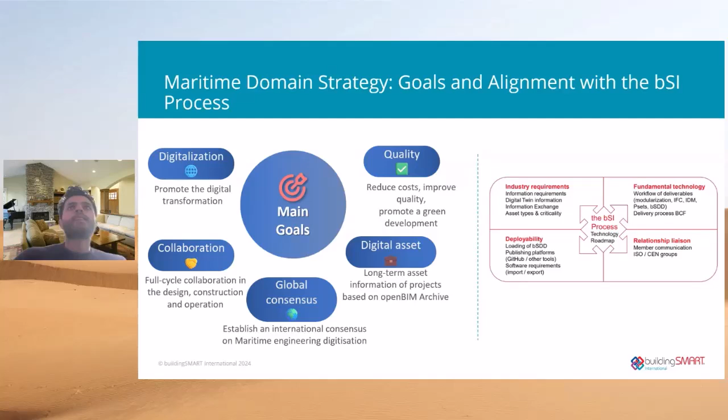Moving on to show some of the potential partners in the maritime domain. We have SINTEF, a leading research organization specializing in maritime sea farming systems and digital tools. What makes their work unique is how they use digital platforms to seamlessly connect subsystems, creating a connected approach to sea farming. We believe SINTEF is interested in joining us, and we've had several discussions with them to see how we can align their work with ours. There's great potential for collaboration in the future.

Another potential partner is Xlinks. They specialize in transferring power from offshore wind turbines to land-based grids using undersea cables. This is one of the points mentioned later in our charter, one of the research goals in the maritime domain. Their work aligns with our vision, and it's important to standardize offshore structures and undersea cables, because one change can affect the entire system. If Xlinks comes on board, they can propose cable-related use cases that help us understand this area and integrate it into our future work.

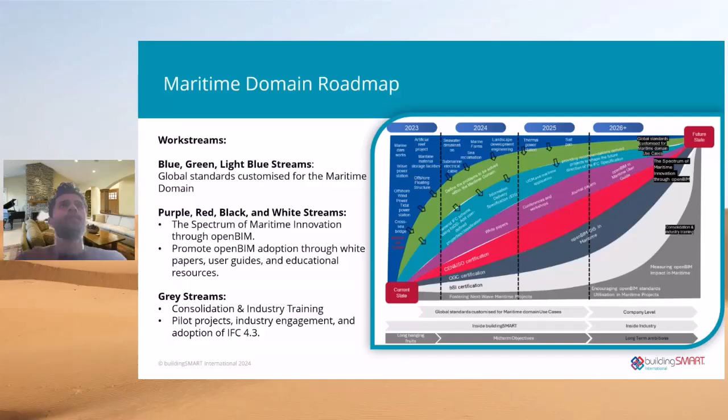As you see, there are different streamlines and work streams in this roadmap. Everyone is for something, and over the next 3 to 5 years, the mission is to implement openBIM workflow in the maritime domain, or align it with the maritime domain.

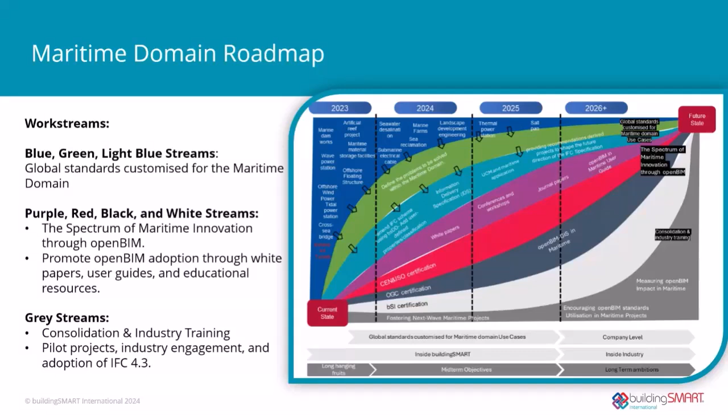We have, for example, here the draft project plan for the immersed tunnel. This is one of the projects that we'll see in the next few slides, and it will help us start to see how we can implement the openBIM standards in the maritime domain. So it will be a starting point for us.

Potential projects - another potential project comes from CCCC, as I mentioned, they're focusing on offshore structures. This is a larger scale farming project in China, located in Dandong City in northeast China, covering 94 square kilometers, fully invested, constructed, and operated by CCCC. They invested around 660 million euros in this project.

They're planning to enhance marine biodiversity by adding these types of reefs and artificial fish sea reef areas, and also including different technology - I see here along the floating breakwater system. There's a lot of interesting things that can be explored, and they all fit under the maritime domain.

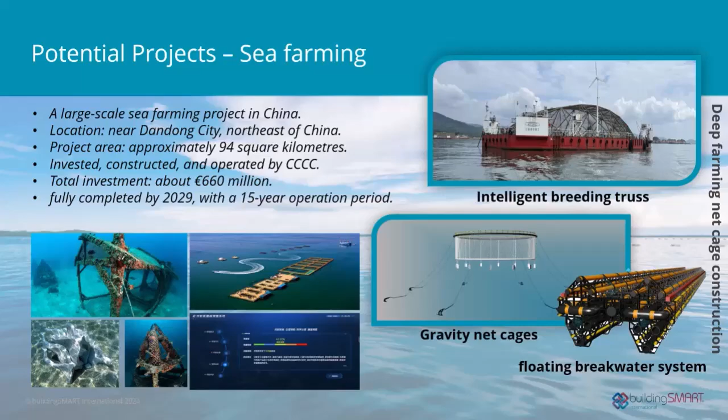But of course, when it comes to proposing any projects, you can start with your draft project plan, and this will be reviewed by the maritime domain steering committee. If it aligns with the vision and mission, we can see if it actually fits under this domain - that decision will be made later. This is why we release the charter and roadmap for you to have a look, see if your projects align with this vision and mission, and if they fit this domain within buildingSMART, because there are a lot of other domains.

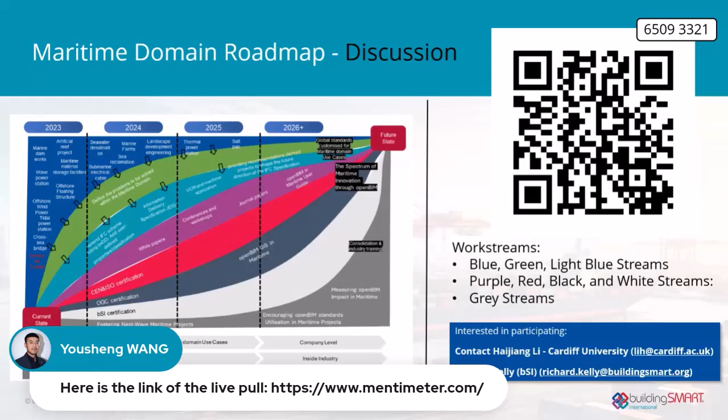As I said, the Maritime Domain Charter is available, and also the roadmap is available, for you to review. You can have a look after this session or in the future.

Let's see if we get some people online. If not, after 5 minutes we can move on. I'm just suggesting that we put the slide back up that shows the potential projects that the domain is going to be addressing. This one? Is that possible? Oh sorry, yeah this one? No, I meant the matrix one. One more, two more. That one, yeah, that one, okay.

So the question to the audience has been, is anybody interested in these particular topics within your industry? And are there any other topics you think the maritime domain should be addressing? It's open discussion, so whatever feedback will be good to discuss, there's no judgment.

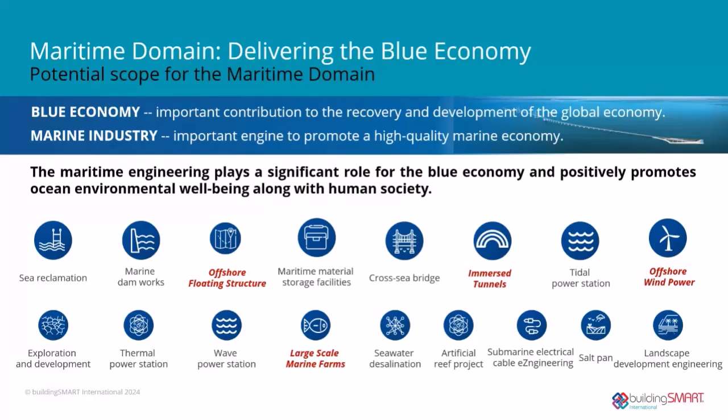I was interested in that undersea cable network, 3,400 kilometers. It's such an obvious idea, but I would have assumed there would be significant transmission losses over that distance. I guess though, if the power is being generated by renewables, then transmission losses probably don't make that much difference, or they're not quite so crucial. And I suppose if it was a thermal power station that's only 33% efficient to start with, and then you're getting transmission losses on top, that wouldn't be worth it. But if the energy's free, then I guess it's okay.

For this second question we have a few answers: flood protection, coastal protection, subsea cables, harbors, submerged tunnels. Submerged tunnels and immersed tunnels are quite a big thing coming around the tunnel projects, which we'll explore next.

I think that one is a bit more detailed, so I will skip this and see how and what area you would like to contribute in the maritime domain. Let's see what expertise you think, or which area you're more interested in.

For people in the room not so familiar with the buildingSMART standards and services, a brief high-level explanation: if you've got requirements in your industry for things you'd like to see digitalized, you specify those requirements in human form, we write things down when we talk. The IDS standard converts those requirements into machine interpretable, computer interpretable requirements, which then allows it to be addressed through the other core standards of buildingSMART. What we're asking the domains to focus on is capturing those requirements, converting them to machine interpretable form through IDS, and then creating a library of entities. That library goes into the buildingSMART data dictionary. Because the data dictionary is linked to the core IFC schema, which has predefined properties and classes, and software vendors are linking their software to IFC, your entities end up in interoperable software. You then get the benefit of using that information on your real projects or operations using multiple software sources, because different suppliers and applications use different software. So it's about standardization of the format for you to get the best access to the information you need.

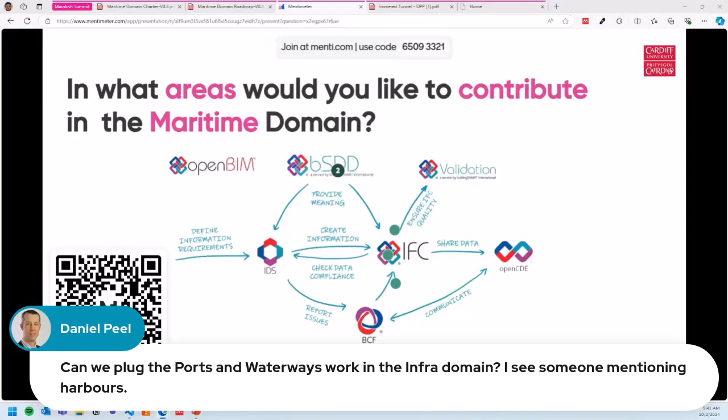Yeah, I'll answer, you mentioned harbours, I'm happy to answer that. The domains are just vehicles, the destination will be the same. So the infra domain has a steering committee of people from the infrastructure industry, the maritime domain will have a steering committee of people from the maritime industry. There is huge crossover, of course there is, the people on each committee could easily sit on each other's committee. What the domain does is oversee the program plan for the next few years and create the program plan. The projects that get delivered could sit easily under one domain or another, and we do a lot of inter-domain collaboration. For example, the IFC 4.3 standard was created through two domains, multiple projects, two domains, one program, and the program was IFC 4.3. So the short answer is yes, we can do that.

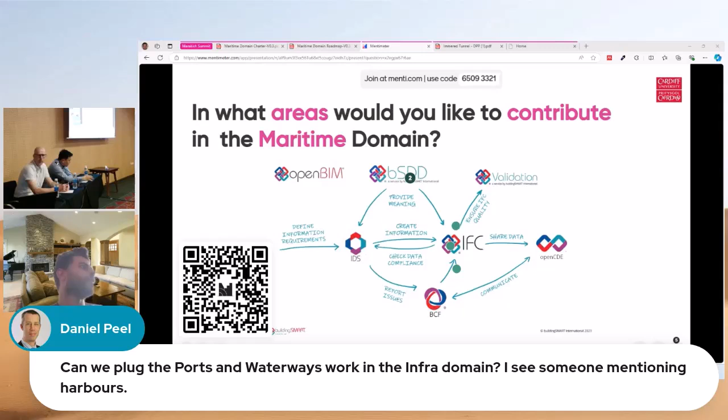And we can see this example in two different projects: we have the IFC tunnel and IFC immersed tunnel.

That's the two projects. There will be a lot of cross between the two domains. You can see them both. They're actually in different domains, but they're serving the same purpose. We're trying to reach the same goal at the end. And same thing for the airport and the building domain.

So they have some entities or properties that overlap, but they're in two different domains, still trying to reach the same goal. We saw this before in other projects. For IFC Harbor, it is currently in the infrastructure domain, but we can learn from that and see how we can leverage this also under the maritime domain.

And that's actually the last question before we go back. Or we can skip this one, is just to see what's the expertise of the people around and how they can actually contribute in this domain in the future.

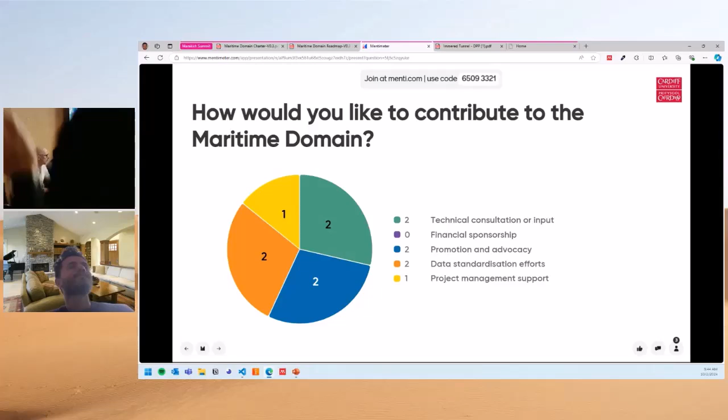Thank you. Just thinking about the advocacy thing, something I'll be saying to the building and infra rooms later today. Do we need to have a focus on the client requirements, the real requirements, and making sure that they are integrated into our projects, so that rather than just describing solutions, we also model and check that we're delivering the capacity and the performance of whatever facilities we're modeling. And I think that would help get the message into the boardroom.

In my view, absolutely yes. How we do that is another matter, isn't it? What do other people think?

Okay, so we'll leave that there for now, but let's just see how the Mentimeter is going on this particular question. Okay, that's nice.

Yasheng, is the intention to actually capture people's names at the end? Because for this particular one, I think we'd like to know who those people are. Okay, well Ali can see who they are. Ah, I didn't realize that. Do you still hear us, Ali? Yeah. I don't think you can see the names.

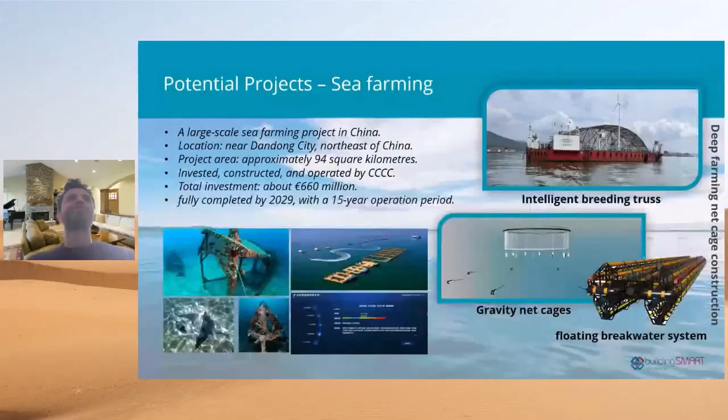So the next one we have the immersed tunnel project, and we'll take this opportunity to provide some updates. We're still on the draft project plan stage, but we made some progress working with our partner HPDI, and also with Royal Haskoning, who showed great interest in this project. I want to acknowledge the expertise of Roy Van Hatten and Renee Zilstra from Haskoning's Immersed Tunnel Design and Consultancy. We had a few meetings before the summits, and we're going to continue this discussion after the summits, so we can have this expertise when it comes to immersed tunnel.

This is more, I think Richard's already explained this, so I might skip this. This is the way of creating the standards: we create the core industry requirements, create a candidate standard, then we test, then once approved the standard into the final stage, and we prepare for ISO publication.

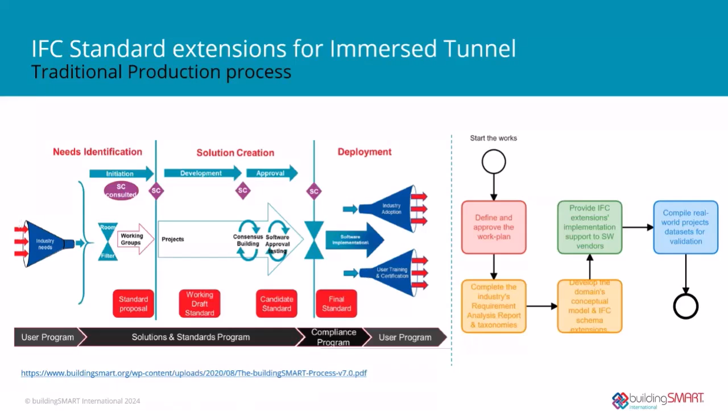But we see engagement from the software vendors usually happens in the late stage of the process, which can cause implementation delays. Sometimes the availability of the solution to the community will be at a later stage. So this process is still happening today, but in a more evolved way, I would say.

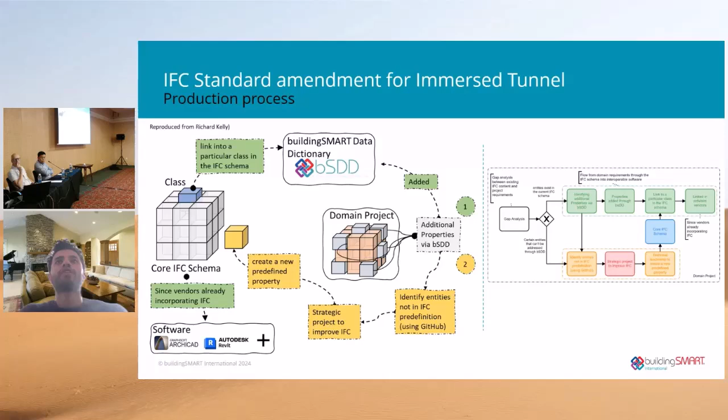So this comes to this diagram that was reproduced from Richard. If you see here, we have two ways. This is how a domain activity interacts with the IFC schema, and the opportunity for the domains to propose improvements.

If you see, there's two different directions. In a domain project, you can define or identify additional properties that are not available in the current IFC schema. You add these additional properties through the buildingSMART data dictionary, which is directly linked to the IFC schema.

This requirement ensures it's actually interoperable with software, because they already implemented the IFC schema and are compatible with it, so they can keep that loop of work. Even when the IFC schema is updated to a new version, say IFC 4.4, not sure about IFC 5, this flow remains consistent, and the domain requirement will integrate smoothly across these versions of the schema.

But sometimes when we do our requirement analysis, we find a gap - a certain entity does not exist in the predefined IFC schema. In this case, once we identify these gaps, we trigger what we call a strategic project to improve the IFC schema. This is led by the technical leadership team of buildingSMART to create the necessary properties and integrate them into the IFC schema.

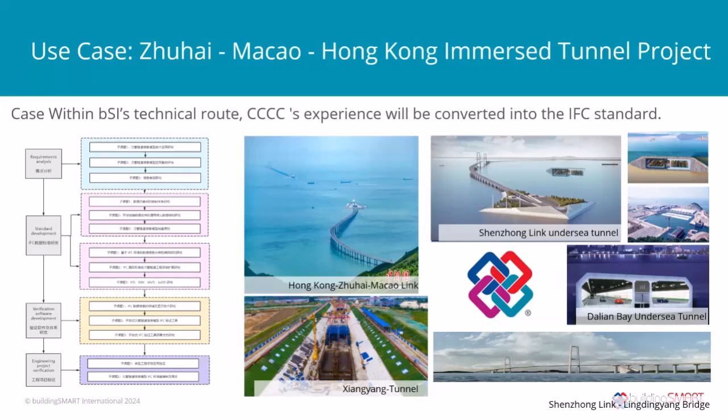If we look at the underwater construction, there's a lot of heavy machines that are all offshore, with these advanced systems. So we need to understand what entities or properties can be included - this is where we do our taxonomy and see all the relationships between these entities.

So we are not focusing only on the design. We can go further and focus on the construction stage as well. But that also depends on the use cases we will have and how we can align them.

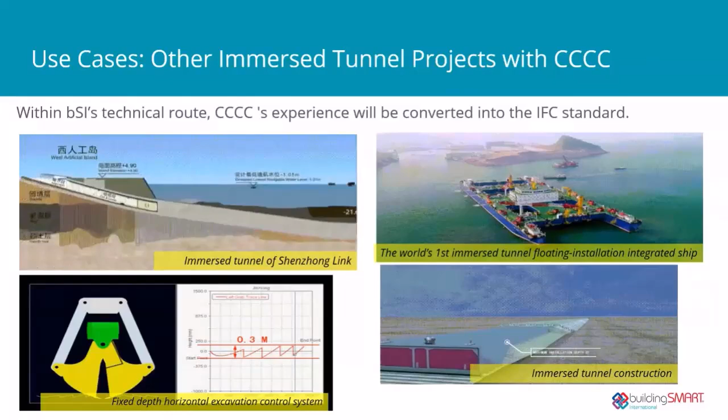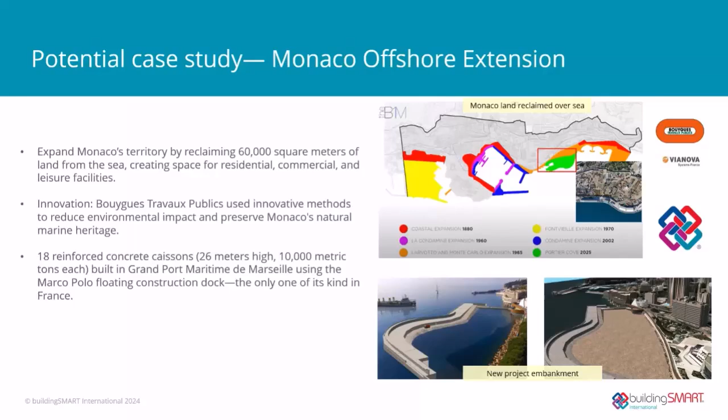In this project, we're referring to the Monaco offshore extension, which was provided by Michel. I think this is self-explanatory, so let's go to this video.

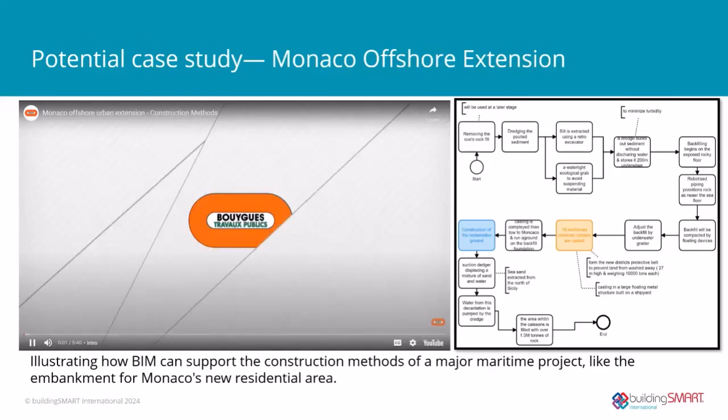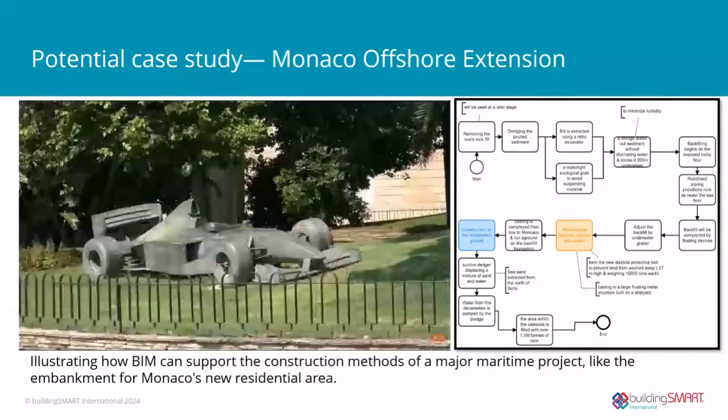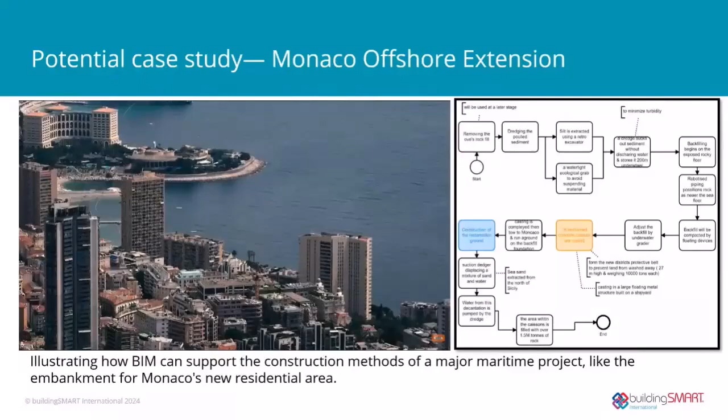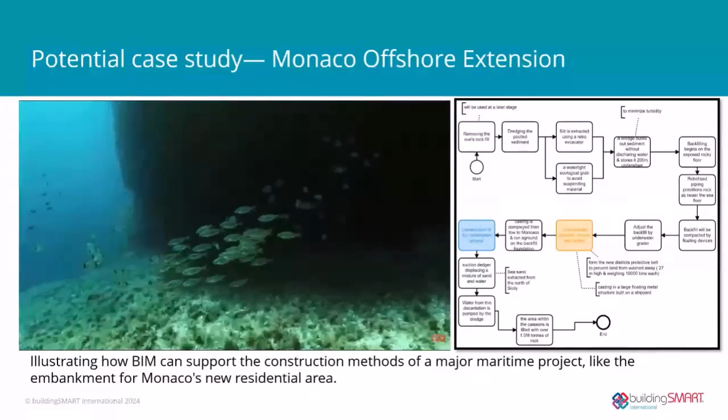For Monaco's Offshore Urban Extension project, Bouygues Travaux Publics has developed unparalleled construction methods to minimize site impact on the environment. Enabling 6 hectares to be reclaimed, the infrastructure is, for the main part, built from the sea. It is made up of reclamation ground surrounded by a concrete caisson belt placed on an underwater backfill, able to accommodate a small port. As early as 2014, with its partners Tractebel, Andromède Oceanology, and DHI, the consortium carried out an impact study to pinpoint the site's environmental challenges and integrate them into the project's core conception and execution methods.

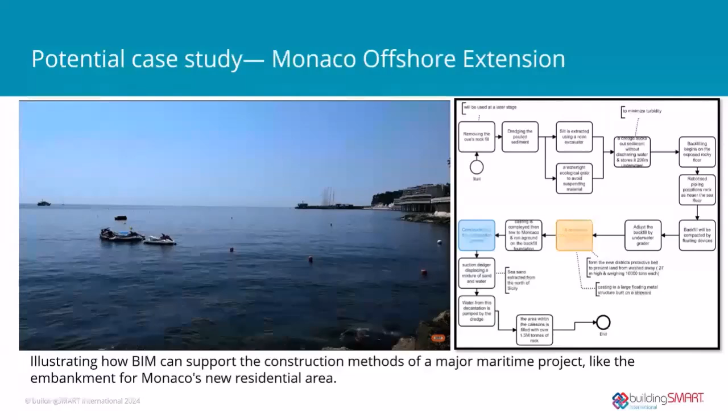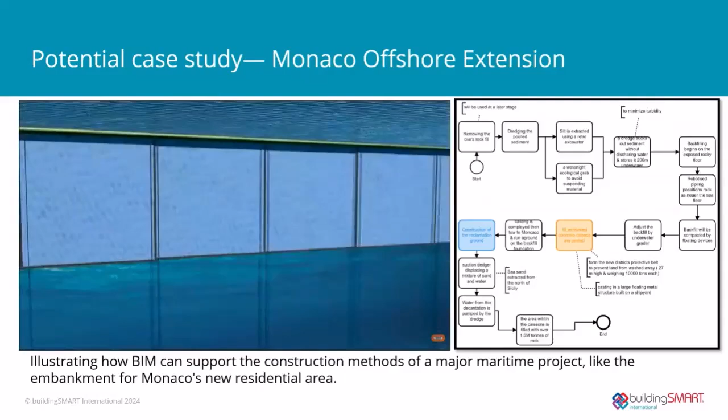Even before the start of works, the first environmental actions are implemented. 47 large noble pen shells are moved to the Larvotto Marine Reserve. Continuous turbidity monitoring devices and 2 anti-turbidity underwater screens are set up around the site. Finally, a noise protection screen is built along the shoreline. Dredging operations will then begin.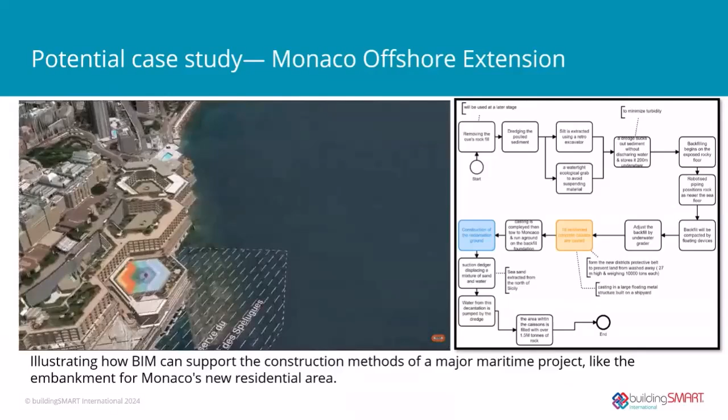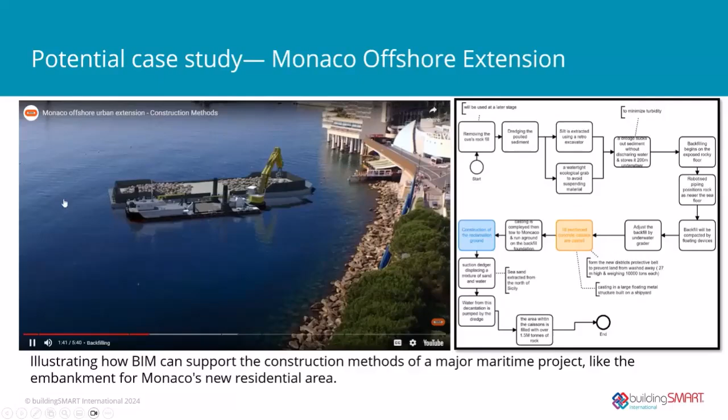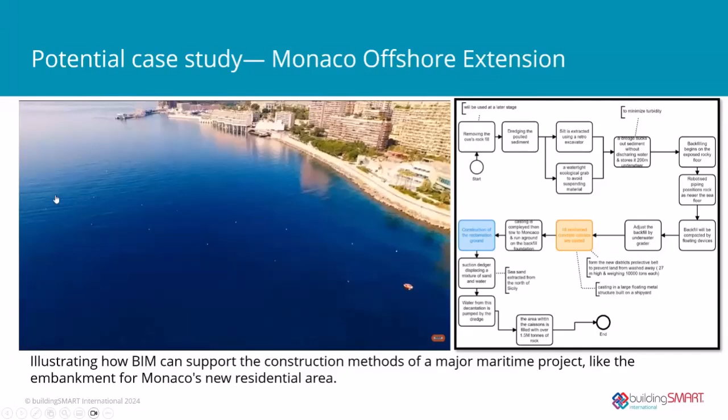Silt is extracted using an excavator with a watertight ecological grab to avoid suspending material. The first riprap layer of the Portier dike is then removed to create nearby ecological artificial reefs. To keep turbidity levels down, a dredge sucks out sediment without discharging water. This sediment is taken to a deposit location, specially chosen to respect fauna and flora at a depth of 200 meters. Backfilling can then begin on the exposed rocky floor.

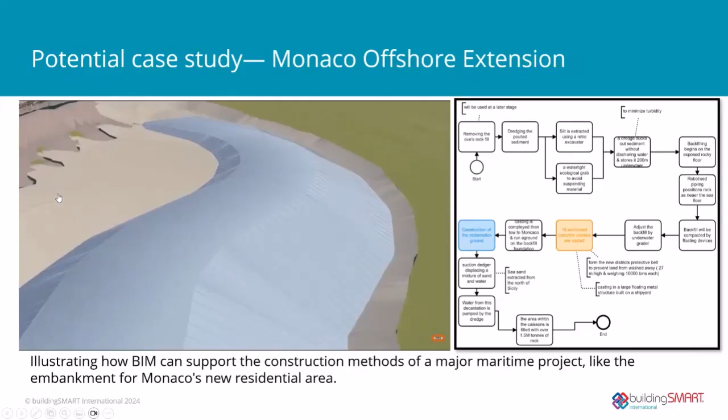Quarry-prepared materials are stored and washed in the port of Toulon. They are loaded onto a dedicated ship and delivered to Monaco after a 10-hour sea journey.

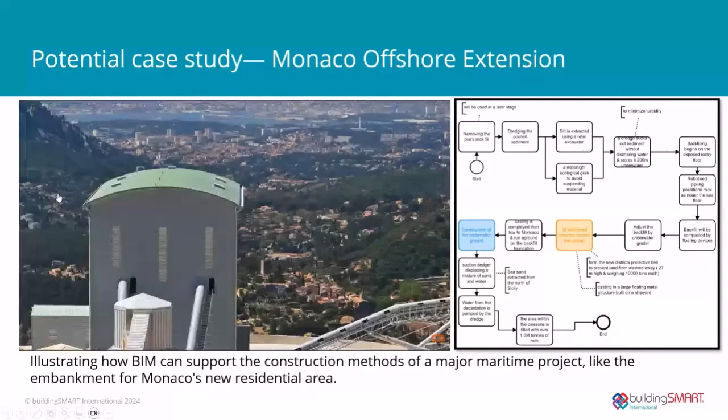Okay, so I played 2 minutes of this video. It's quite a long video, so I'll leave the link for you guys to have a look, so we won't be running out of time in this session.

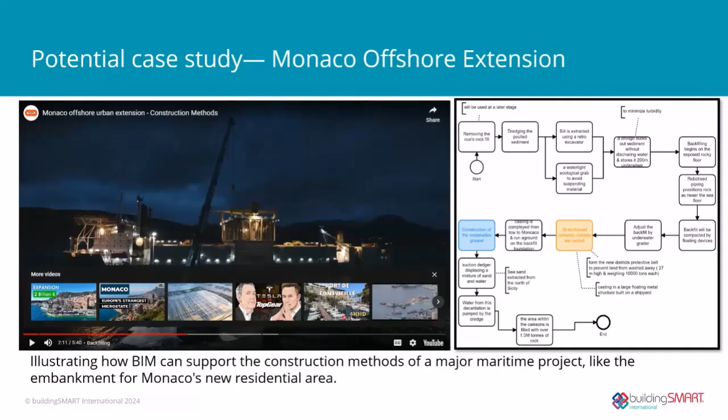Drawing from these experiences and use cases, we aim to combine all the best practices and lessons learned to contribute to the development of openBIM. This project is meant to amend the IFC schema for immersed tunnels, describing the workflow I showed. The diagram was reproduced from Richard, using bSDD and IDS to improve data consistency and collaboration across teams, enhance decision making, and provide a future recommendation for IFC extension, which will be decided later by the technical leadership team of buildingSMART.

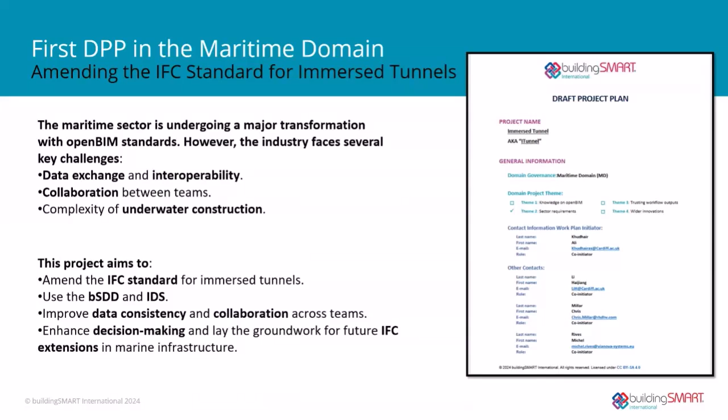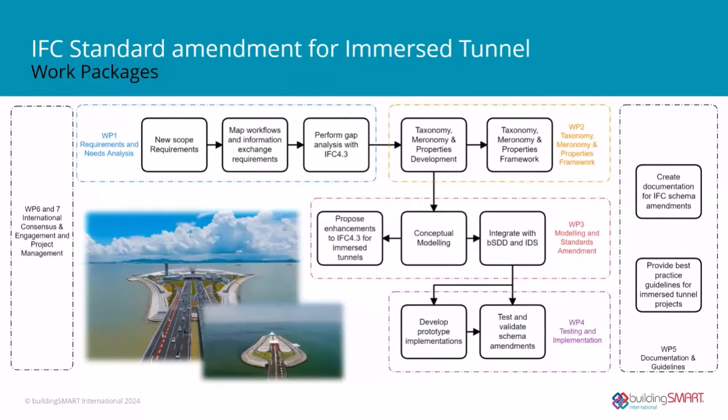So I think that's all from my side. I will pass it now to my colleague, Luigi, if you want to start your slide.

Thank you, Ali, for your thorough introduction to our domain and project, and hopefully our audience now has a general understanding of our domain and what we are doing. A bit more about the project and domain: we published the domain last year, so it's relatively new, and our first project is this immersed tunnel project. There are still lots of possibilities and potential in the domain and project, so we want to reach more participants and companies to join us hand in hand to create a greater domain and make more projects.

A bit more about the companies currently running the domain: CCCC is my company, and we have done several mega infrastructure projects in China, for example the Hong Kong-Zhuhai-Macau Bridge and the Shenzhen Link. These two projects are really big immersed tunnels that we designed and built. We really want to bring our engineering experience to buildingSMART and help finalize the IFC standard. Yesterday I talked to colleagues from Royal Haskoning in Holland, and they told me that the biggest advantage of creating IFC is to make a uniform language about everything. For example, if we collaborate internationally on a project, everybody is talking about the same thing, so within this standard language we'll have better and smoother international collaboration.

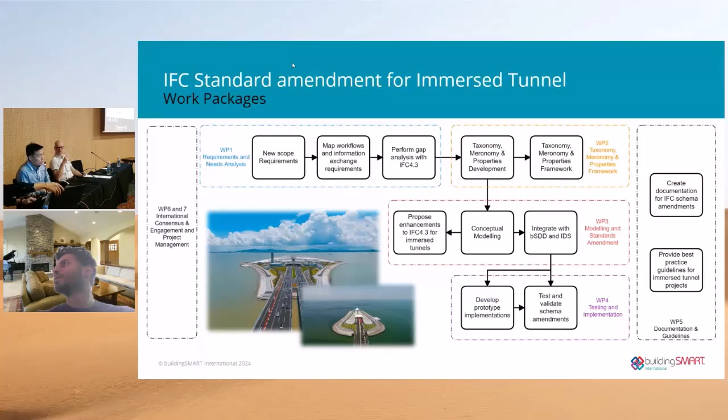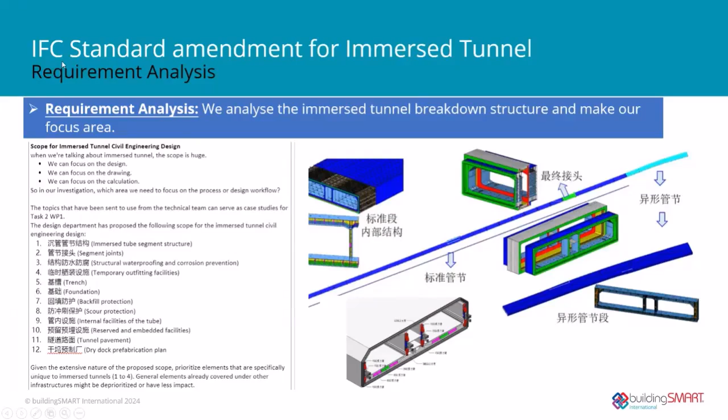Let's dive deeper into the project. Since we've been running the domain for one year, and the project for more than six months, the first step is to do the requirement analysis, which is always the first step when starting an IFC project. Currently we first analyze the structure of the immersed tunnel.

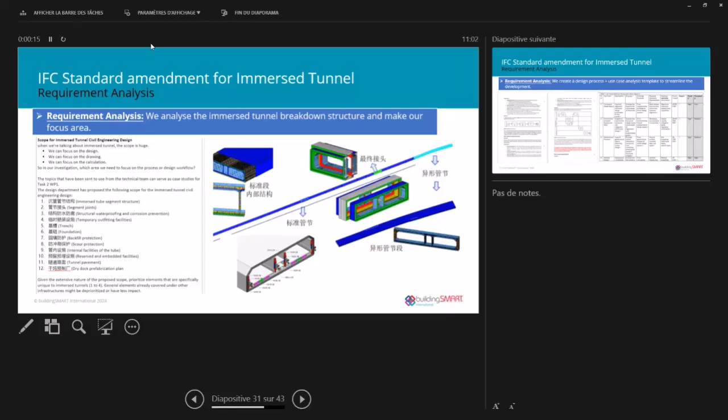Since there are really several types of immersed tunnels, we picked a general one and split the general structure into 12 segments—for example, the main structures, the joints connecting the structures, the waterproofing and anti-corrosion proofing, and the temporary outfittings. These are the four main areas we want to focus on in the first stage, and there are still more segments from the immersed tunnel that we want to accomplish later. So that's the first step we have done.

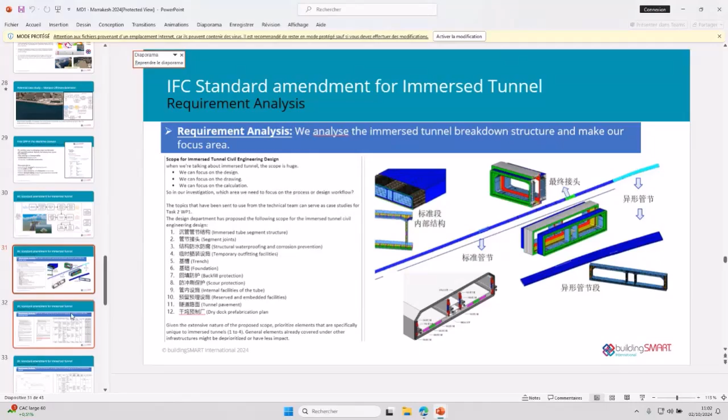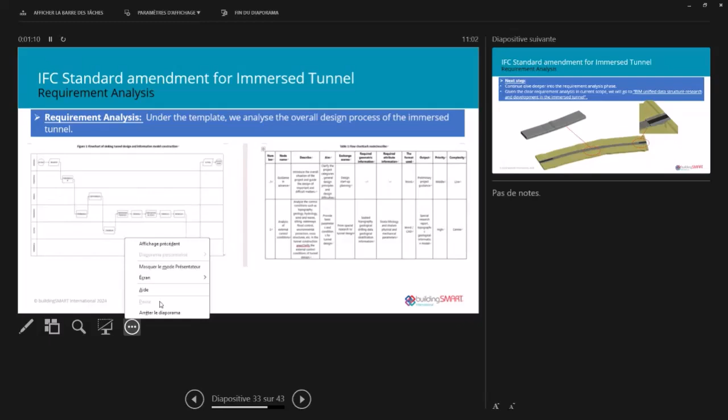After we analyzed the breakdown structure of the immersed tunnel, we wanted to extract more information from the whole design process. So we first created a template for how to make a standard design process and use cases. With help from Cardiff University, we created this template and delivered it to our designers, who can follow it to create their process maps and extract information between different disciplines and different steps.

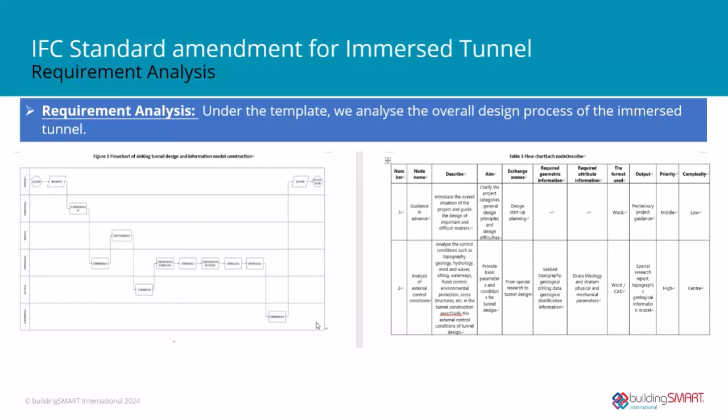According to this requirement analysis template, we map the first requirement analysis for the immersed tunnel general design, because the design process has different levels and hierarchies. The first step is to make the overall design process and create the use case maps, and later we will dive deeper to map more detailed design processes.

Another next step is once some requirement analysis is fixed and done, we will go to working package 2, which is the BIM Unified Data Structure Research and Development. So that's our next step.

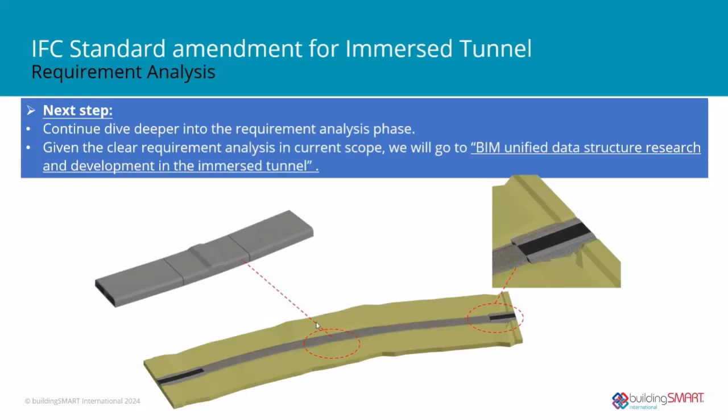Also, in our project we have a design team behind us, and a development team supporting the whole project. Because the IFC development process is really long, maybe 3 or 5 years, so in order to catch the most cutting edge technology, we also make a use case innovation in our project.

So we choose a very common scenario in our project, which is pile calculation, because piles are not only included in tunnels, but also in buildings and bridges. Piles are everywhere. So we choose this generic scenario, and because this scenario is really small, we want to make innovation inside this.

So we first define the pile calculation process: firstly from geological exploration, then to pile general arrangement, and finally we go to pile calculation. So it's a really simple and standard use case.

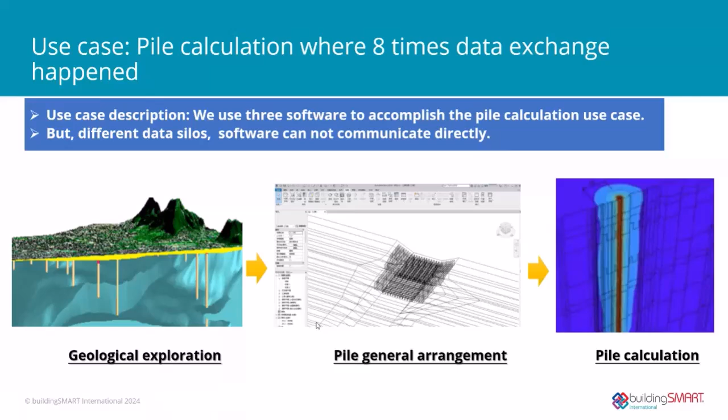But the problem our company faces is there are dedicated teams to do each of them, but they cannot directly connect because there's no communication file or communication data format. So that's the problem we face.

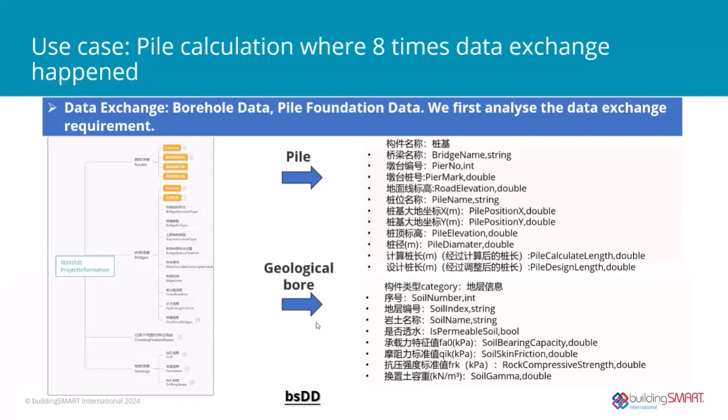According to this, we first analyze the data exchange requirements from both sides. For example, the pile and the geological bore, we extract the information from them. During this process, we instantly collaborate with our designers in order to make that data reflect reality. So that's the data exchange part.

And then, because buildingSMART has the bSDD service, which is really great, but before that, we created an online platform by our own in order to serve the dictionaries. So we can store the data exchange information into this online dictionary, which can be used by everyone.

Once we have the data exchange, we would like to implement the whole scenario with our software. So then it comes to storage, because as we know, IFC is a physical file for storing information. But one problem is that IFC files are more for big scenario exchange, it's not very friendly for small exchanges.

So according to this, we store our information into the database. Simply put, we store the entity information and the relationship entity information in the database.

Once we have data exchange and storage, we want to connect the database with our user front-end software. The core part is how we can connect the database with the software. So then the concept of IFC-JSON comes in.

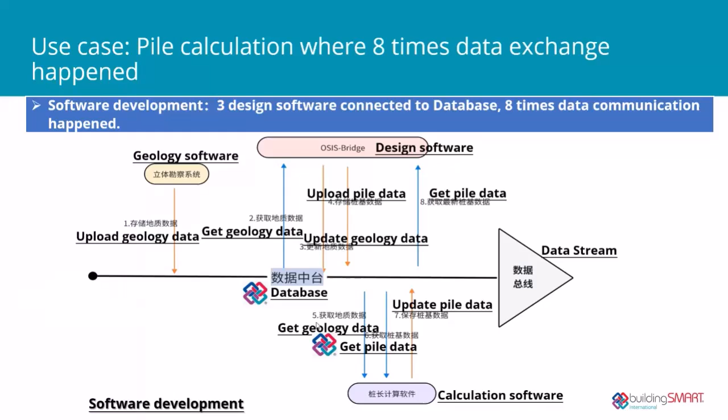So that's the latest developments about our project and innovation for a really small use case. And I think we will keep going to make more innovation.

I think next I will hand the microphone to Ali again. Yes, let me.

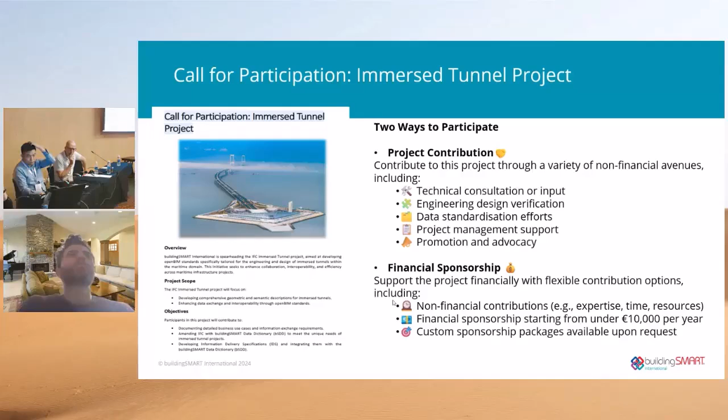As I mentioned earlier, for the maritime domain, that was a call for participant at the domain level, and also we have a call for participant for the immersed tunnel project, which is more a project level. If you can contribute or are interested in this project, we have a call for participation that will be available on buildingSMART websites. There are different types of contributions - project contribution or financial sponsorship. Please get in touch if you are interested in the immersed tunnel project. We'll have a lot of use cases in the future, so we need your feedback and expertise.

So there are several different types of contribution you can make to this project. Can you go to the next slide?

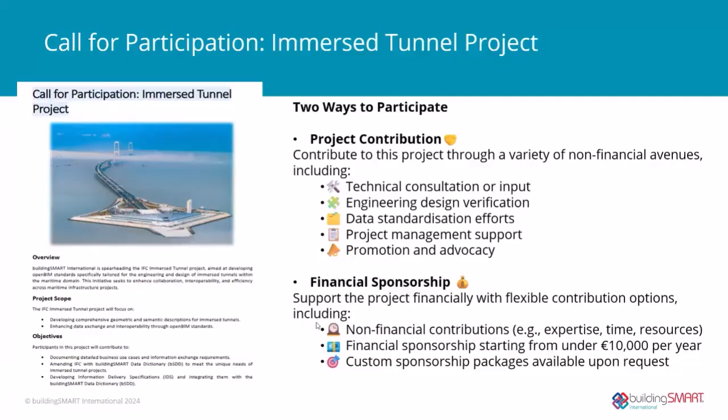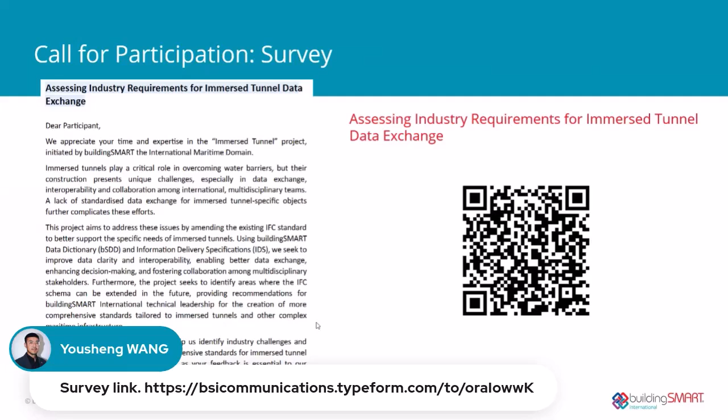So I think we'll just stay on this slide and open a discussion, similar to the last slide - we might just stay on the survey one. So for everyone who wants to scan that barcode, we can take any questions when it comes to the immersed tunnel or anything related to the maritime domain. Please ask.

Okay, any questions from anybody in the room? Yes, there is. Yousheng, could you bring the microphone over? Question in the room, Ali. And could you introduce yourself as well, please? Thank you, okay, my name is Gao. I'm also from CCCC, the same company with Mr. Liu. I think so. Is it on, Yousheng? Is it coming through? Yes, yes, yeah, okay.

Okay, Mr. Gao, thank you. I'm also working on the IFC updating for the port and waterway part of works. In my understanding, for now there are several domains. One of the domains is already named the port and waterway domain. There's no maritime domain, I think, at this time - it will be changed in name.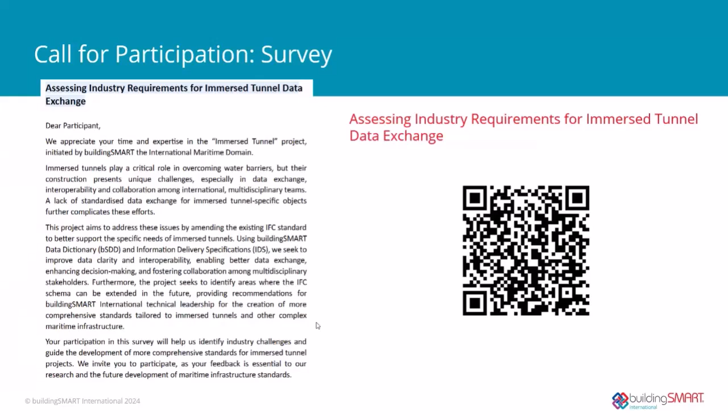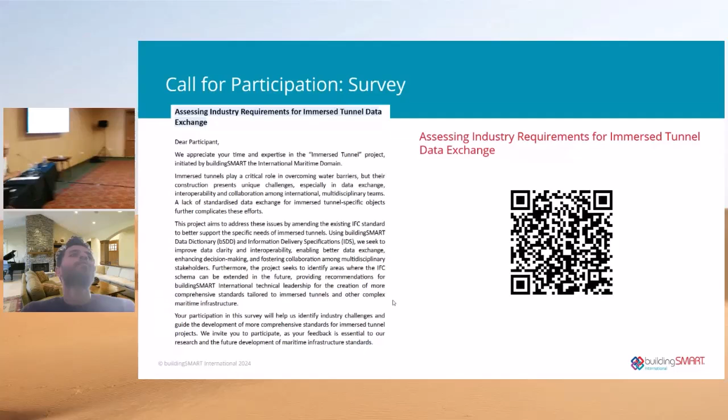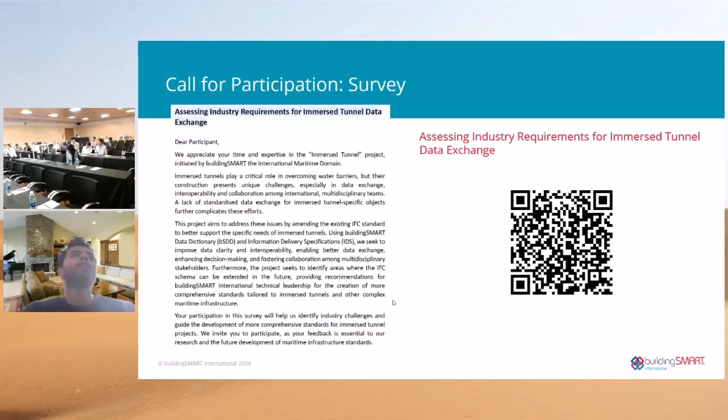I think these proposals are more like giving some idea about the area that might be incoming - what we called in the past an activity proposal. So it's not necessary to fit the maritime domain vision and mission exactly. You write the proposal, or what we now call the draft project plan, and your draft will be reviewed by the domain to see if it actually fits under this domain. If it's not aligned with the maritime domain but fits under the infrastructure domain, that's what we'll give as a recommendation. So these are more like suggestions - that's what we need your feedback on, what type of projects can go under the maritime domain, because we need to keep updating these documents, the charter or the roadmap, to fit a bigger vision or picture.

Oh, okay, thank you very much. So I just want to make sure no one will do the repeat work.

Yeah, that's definitely important, because when we do our analysis, we want to make sure we can reuse work from other domains and previous developments, so we don't need to repeat other people's work in a new project. That's one of the things to look across domains and across projects as well. So different levels need to be considered when we build these documents and when conducting any project.

Yes, indeed. And Mr. Gao, thank you for your question. I understand your concern. The other aspect of our process is that any project plan that's put forward is reviewed by the domain steering committee, but it's also reviewed by a central program management office. That office would then see if one project is the same as another, and therefore one of those projects would be stopped or the projects would be combined.